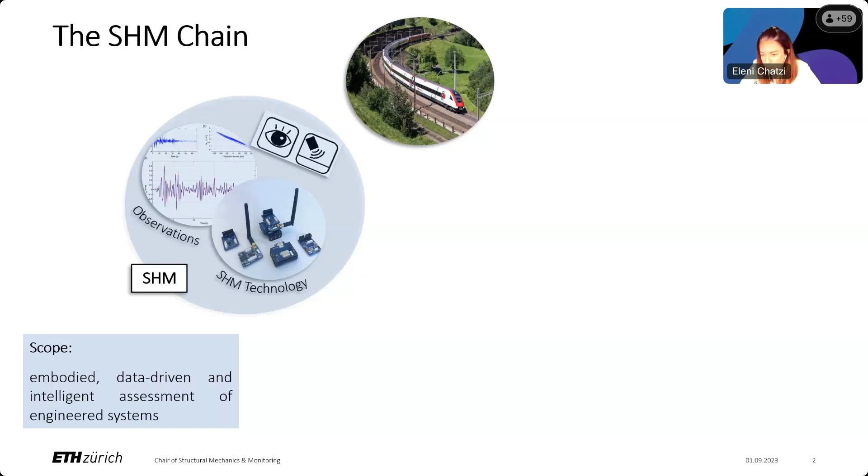And structural health monitoring, from my point of view, can only be conceptualized as a chain which initiates with the gathering and accumulation of data from different types of sensing sources, offering heterogeneous information of diverse types. In my group, we're particularly interested in exploiting vibration-based signals because often they are very rich in content and information. And that's also why in the chair of structural mechanics and monitoring, one of the domains of our expertise is also structural dynamics.

And what we try to do on the basis of this accumulated data is to exploit the information and translate it into something that is interpretable, something that can be used by engineers for the management of their assets, typically in two configurations: the diagnostic configuration, where we try to assess the condition of the system as is, and the prognostic configuration, where we're interested to predict the future performance or remaining useful life of a system, extracting quantifiable indicators that can guide their operation, maintenance, and overall management.

Now, of course, the translation of data into meaningful information is not trivial, and this is where the particular expertise of my group comes in, which lies in the exploitation of models that draw from principles of physics, in the sense of mechanics or dynamics, and where through these models we can actually maximize the information that can be drawn from the raw data.

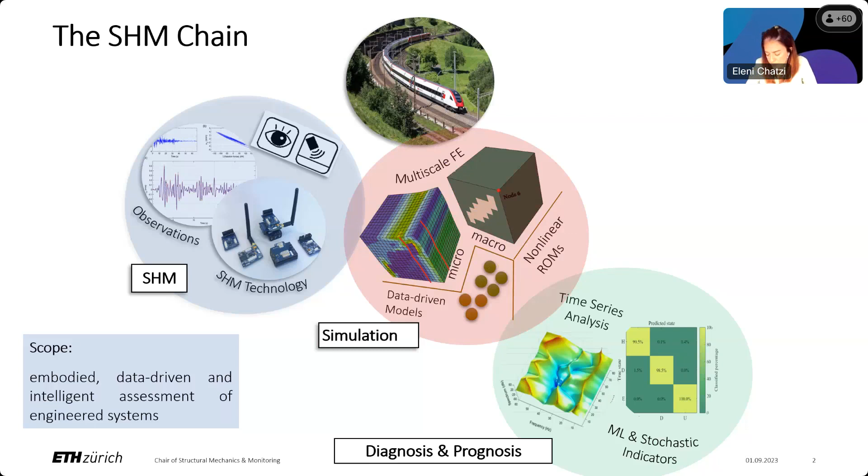And after creating this kind of a synergy and these quantifiable metrics of system performance, we try to then extend these to the system level. So I spoke earlier of wind turbines, but we're also interested in trying to understand performance at the level of the farm, or the fleet of farms that are operating or on which we draw data from.

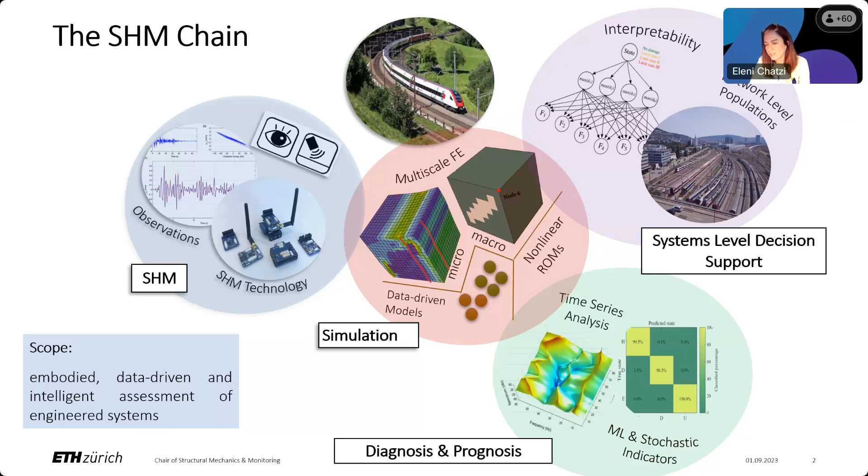Or if we're talking about more conventional civil engineering infrastructure, we would be talking not only about individual bridges or road components, but rather of the transport network as a whole, as an entity that can be managed on the basis of flow of data. So these are the elements of the chain that make up SHM, but also the chain that is relevant for us in terms of the fields that we're active in.

So as I mentioned before, we gather data from various systems. We have a collaboration with the railway authorities here in Zurich, where we use sensors mounted on trains or vehicles to understand the performance not only on the vehicle fleet side, but also the traversed infrastructure side.

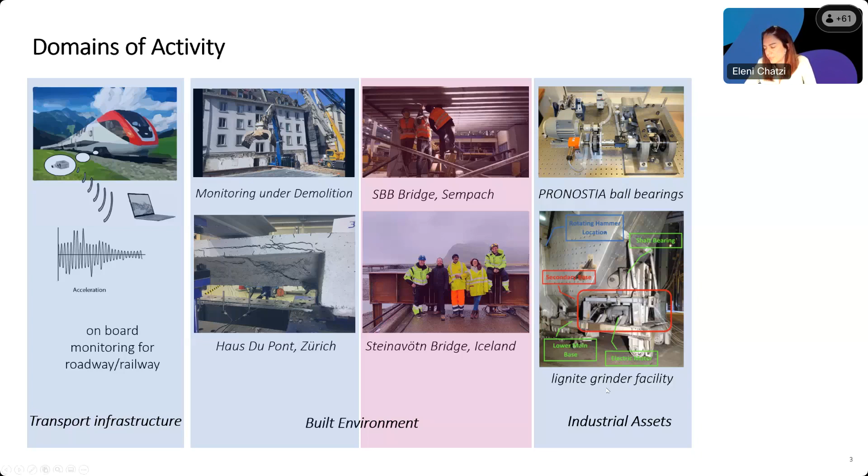We deal with more traditional civil engineering applications like the monitoring of buildings under, for example, seismic excitations, or the monitoring of bridges under the different types of loads that they are exposed to, including aging and slow evolving deterioration forcings. And of course, talking about condition monitoring, we also have applications in the more traditional area of industrial assets, and of course, wind energy structures.

In fact, it might be interesting to know that we even own a turbine. So this is a turbine that is not too far from our campus, which we use as a living lab. It's sort of a toy in a sense that we try to use and experiment with for testing and verifying our methodologies.

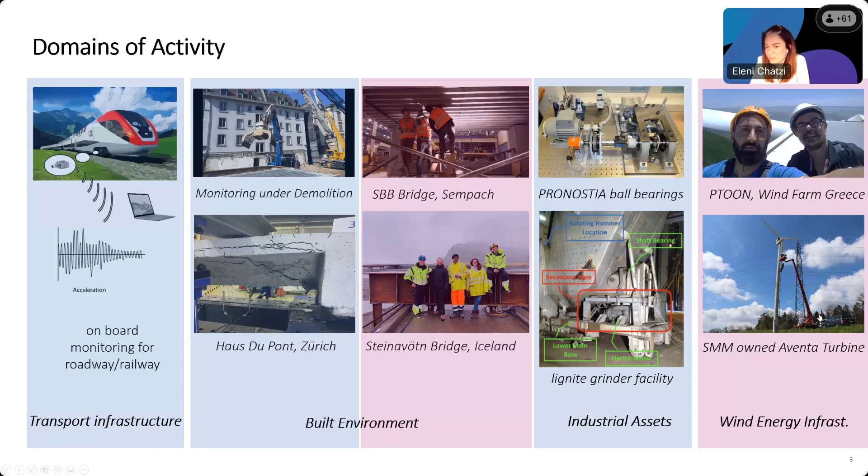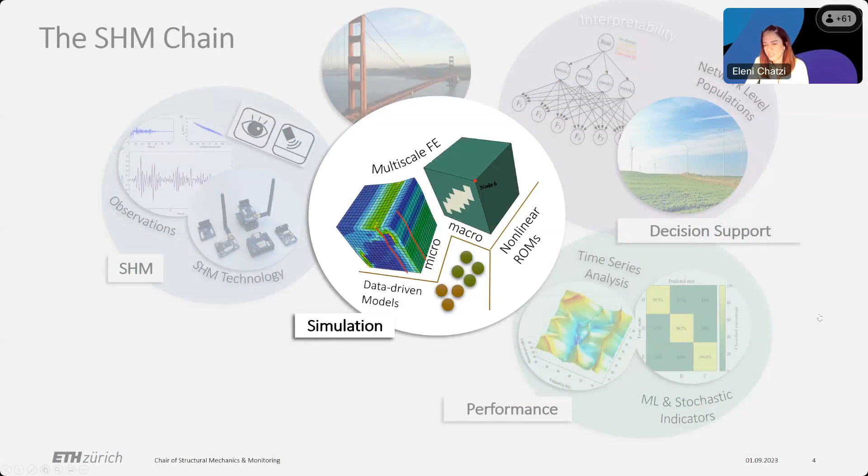And so I will focus in this talk, as the title somehow hints, on the aspect of modeling or the inference of models and how this can be used in a way that maximizes our understanding of a system, which is what we would like to do at the end of the day. But before I do that, I always think it interesting to also point out what we can do on the basis of pure exploitation of data without necessarily trying to include some knowledge of the physics that underpins our problem.

And to do this, I will show you again an interesting application here at the farm level from wind energy monitoring. So in this case, we're trying to see if we can produce a data-driven model that can capture the effect of wakes, which is actually the effect that these front turbines will have.

Now, if you would like to model this with physics, the problem could become quite complicated, and there are models that try to approximate the problem, but of course there's no guarantee that they reflect exactly the condition on site. So to tackle this issue, we actually use the data that we draw from monitoring of these turbines, so data at the level of the hub that give us information about the mean wind speed and orientation, as well as the power production, but also moment data that has to do with the loads that are experienced by these turbines.

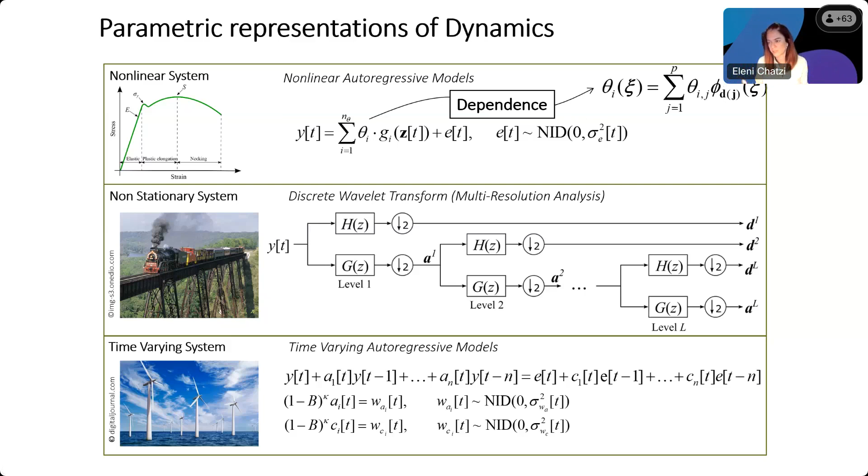And this is quite convenient because when you want to have a holistic representation and a dependence on influencing agents, a parametric model gives a natural means to do so, because these coefficients or parameters of the model can be conditioned on these influencing agents. And this is one way to do this. Actually, the expression that you see here is through a polynomial chaos expansion. It's basically an input-output surrogate, stochastic surrogate, which gives the dependence of these coefficients as the environment changes.

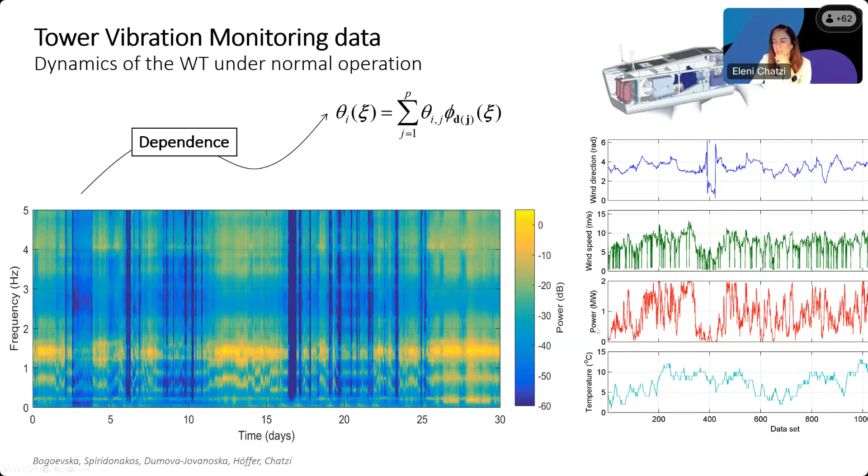And if we can do that, then we can train for a sufficient period of time our hierarchical model and then use it as a predictor and understand the deviation between what we predict and what we measure. Of course, there will be outliers which require robust outlier analysis and statistical analysis so that we can then classify the alarms that we receive, or rather the indicators that we calculate, as in the green region. So operating as expected in normal conditions.

In the red region, so in known environmental conditions, we receive alarms. So this means we have to act, or we have to signal for repair or intervention on our system. Or we receive alarms which are actually outside of the regular thresholds of our environmental conditions. And this is what we would issue as an orange alarm, which means that there's something off, but it could be off because we are in a new environment. And this is something we have to treat with further analysis.

So in structural health monitoring, because we're often in close collaboration with operators and engineers, we like to present these red, amber, green type of alarms to the stakeholders. And this is something that they're more comfortable with, that they understand, more so than just a plot with outliers.

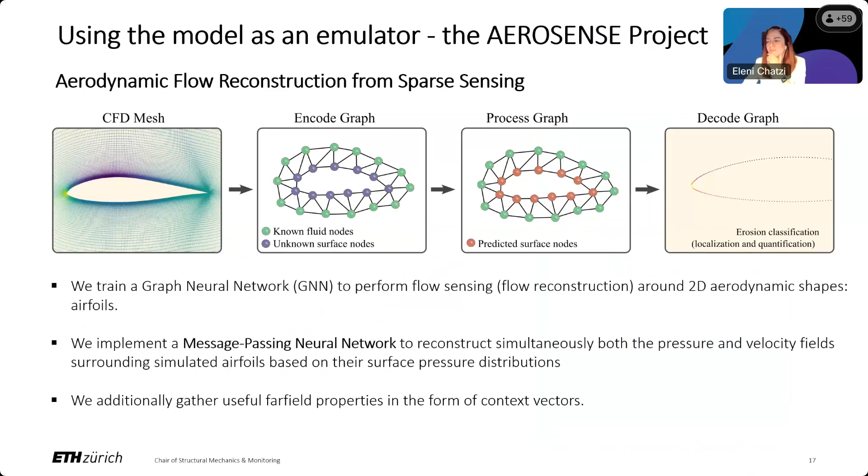And on which I would like to actually focus on. So let me actually go directly here. How we can fuse data and physics-based models for learning, monitoring, and twinning, and feasibly do so in real time.

Now, the reason why this is not an easy task is not only because of the complexity of the models, which is often what causes them to be slow in terms of computation, but it's also because the effects that we have to account for are rather complex. I already referred to the aspect of loads that reflect varying environmental and operational conditions. This could also refer to loads that lead our systems to experience nonlinear behavior that is beyond the easy to compute, let's say, linear elastic range.

In fact, most of our loadings are distributed loadings, so it's not easy to model these with just simplified point sources. And further to this, they're also in most of the cases actually unknown or even unmeasured. And so we have to deal with all of these intricacies and try to deliver a predictive model that can cope with this uncertainty and do so in real time.

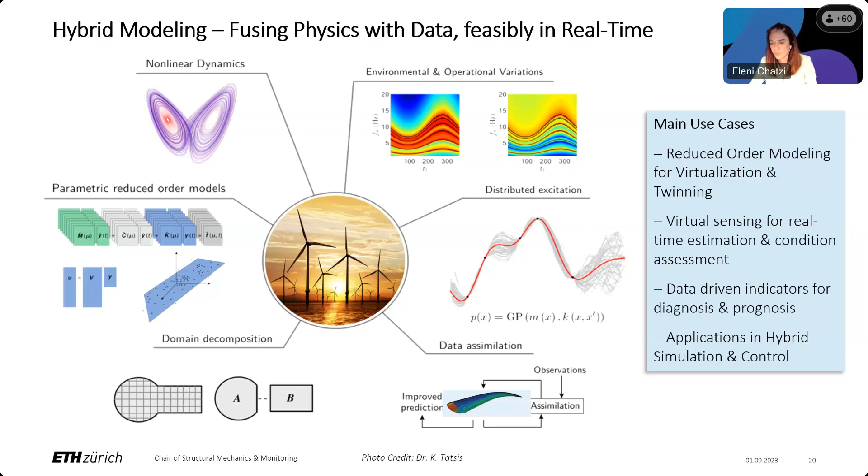And the motivation being that we would like to use this as explained before for twinning applications, for the goal of virtual sensing. Virtual sensing is the situation where we wish to extract information from a system, predictive information beyond the usually few and sparse locations where we sense. And when we try to construct a proper digital twin, this is very, very important because we should not just be predicting where we measure, but rather in the full field of this object that we try to monitor. And of course, the downstream tasks are numerous, including control and diagnostic aspects that have to do with maintenance.

So I will pick one of these tasks to exemplify the framework that we have set up. And for me, the most interesting, as I sort of hinted, is the aspect of virtual sensing. Predict the response of the system feasibly in real time in locations that are not measured, or as I come to refer to it, basically achieving everything everywhere all at once. And here's what I mean by this.

This is our typical monitoring problem where we have a structural system on which some sensors, usually few and sparse, are located. This gives us some sort of measurement information. Our system is operating under inputs that we cannot measure. That's the case for a bridge. Even for a wind turbine, we claim to know the wind speed and direction, but we don't really know the proper distributed force of the wind or the wave as it is acting on our offshore structure.

We have, as engineers, some sort of a priori model that was used to put the system in place, but usually it's not an accurate model, or at least it's not a model that has been updated necessarily to reflect the system at its current point in time. And therefore, it could feature unknown parameters additional to model form uncertainty. And the objective is to extract the response of the system. These so-called unknown states is the response of the system in unmeasured locations, which actually can be numerous.

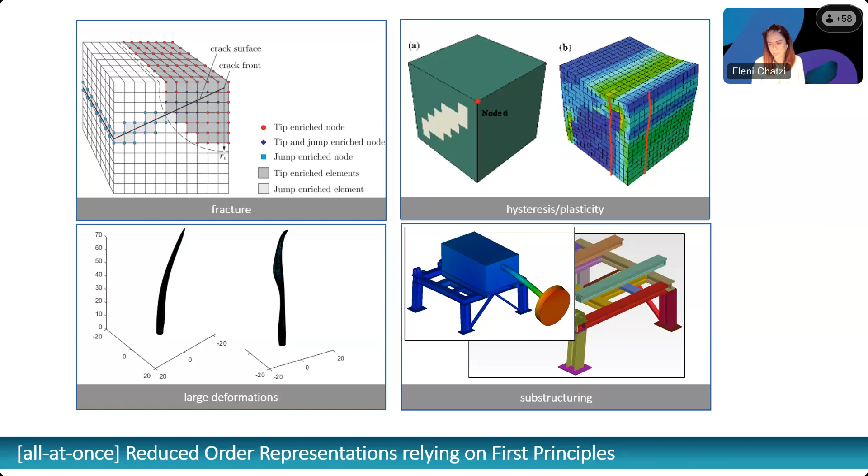We need to boost this kind of a computation, and one way to do this, which is quite popular in recent years, is to do it through exploitation of the power of learning through machine or deep learning formulations, all the while, though, respecting the fact that we have to learn from physics and engineering intuition. So here's one approach to doing this.

This is work by Tom Simpson, one of the PhD candidates who recently graduated from our group, who tried to reduce full order complex finite element models. For civil engineering, this is one of the favorite types of models, usually with a large number of degrees of freedom, which compute in terms of dynamics most often quite slow.

And so what we did was to train on several instances of such models, or at least on several forcings that are applied onto such models, to extract a so-called latent representation of this multi-degree of freedom system, essentially a reduced order space where the dynamics of the problem lives and can be characterized, but with a condensed representation. And then we try to apply the actual forcing of the system onto this reduced representation.

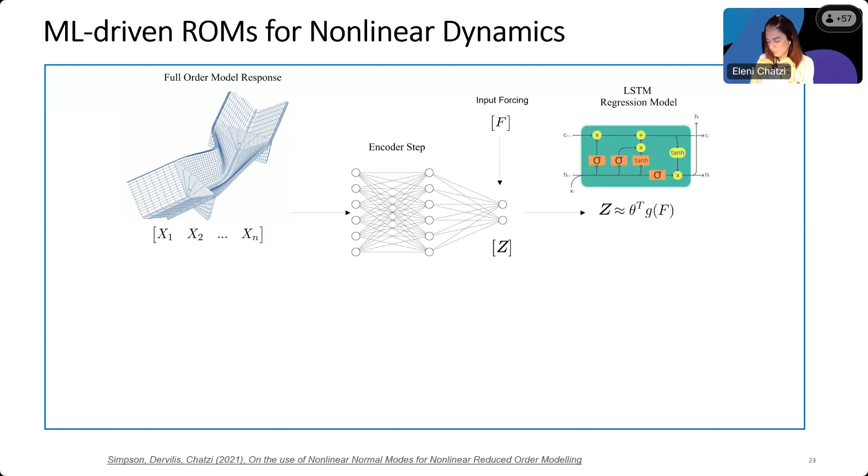And we used a numerical integrator, or the equivalent of this for neural networks, which is in our case an LSTM, RNN type of model that takes our prediction from point in time tk to the next point in time. So now we have computation on reduced coordinates, and we have a possibility to simulate the system in this reduced space over time.

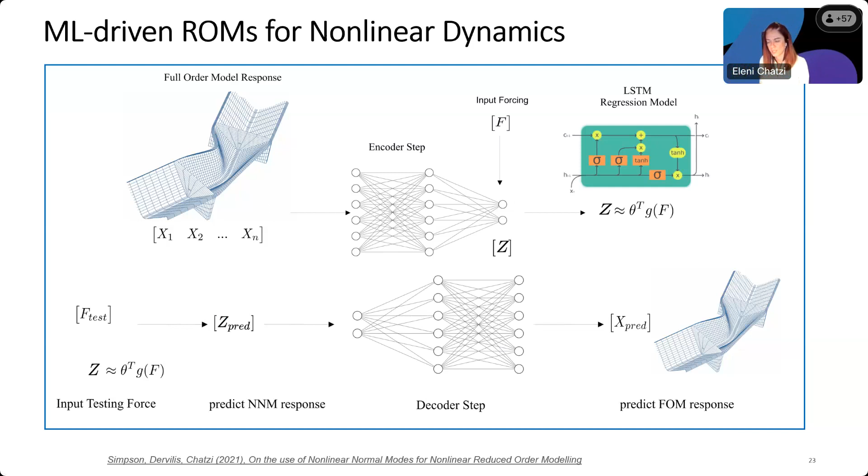At the same time, through the nice property of autoencoders, we can go back to our original representation, the original finite element model, through the decoding step, and extract the response of our desired system in the full field, in terms of strains or accelerations, in general in terms of the quantities that we're actually going to measure eventually from this system, simply through this decoding procedure. So this gives us significant acceleration. It allowed us to simulate systems that are nonlinear.

So this one is actually a nonlinear benchmark that was defined by our colleagues in Los Alamos in the US, a nonlinear frame with a bumper where the response of the system is challenging to simulate with traditional system identification tools that prefer linear systems. So here we simulated the system using this autoencoder logic, showing that the reduced space that we extract from the system is actually a type of nonlinear normal mode.

So they're basically modes that are independent. The majority of the spectral content of these modes actually reflects a specific frequency. They're still nonlinear representations, but it's actually what empowers us to then simulate the system using this reduced representation, even in the nonlinear case.

From a practical viewpoint, we implemented this logic on the nonlinear response of monopile wind turbines, where nonlinearity comes from the behavior of the soil, where you see these typical PY curves on the basis of which the wind engineers will simulate these models. And that's indeed what our colleagues in Siemens Gamesa did.

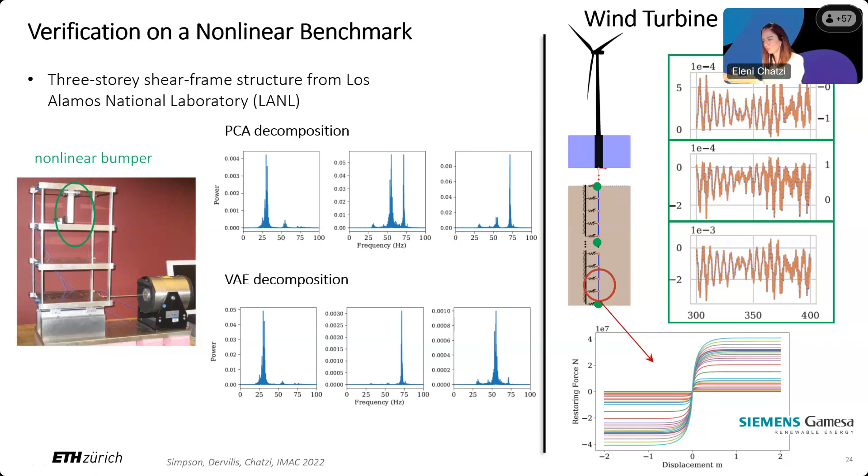They did the actual simulations on which we trained this autoencoder type of reduced order model, which then replaced their simulation with high accuracy, only it did so in fractions of a second, meaning it gave us a computational model which can compute in real time and can be later combined with data, which is really what we seek to do.

A bit of an issue in this reduction approach is that for most of these configurations, we haven't so far discussed the issue of simulating systems of different parameters. So even this monopile structure is actually a fixed structure and system, which we simulate under different types of loads, and we try to accelerate the simulation for this particular instance.

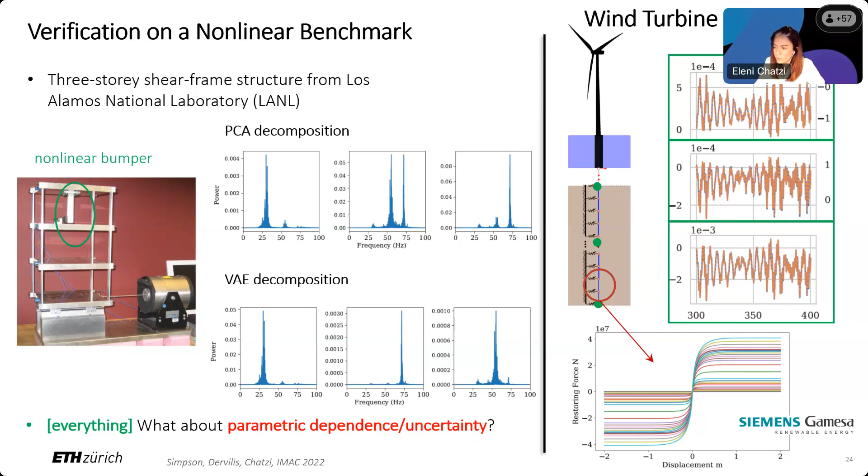But if you want to have a general model that can compute over different parameters and different configurations, so different shapes of the tower or lengths of the blades and whatnot, we have to construct a so-called parametric surrogate. And to do this, one of the approaches that we follow is the so-called projection-based parametric reduction.

It's actually a Bouc-Wen type of model, which means that the response of the system to earthquake loading, which is a typical excitation for the analysis of these structures, is nonlinear. And what we would like to do here is to produce a parametric model, so a reduced order model that can run for different configurations of the system, meaning for different properties of the hysteretic model of these nonlinear joints, but also for different characteristics of the input forcing, the earthquake, which can come at different amplitudes and with different

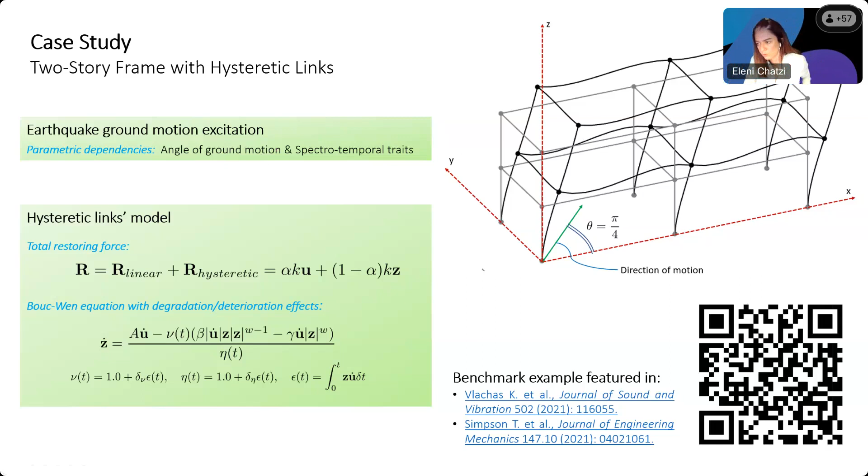spectral contents. So to try and do this, the first thing we have to do is to actually parameterize our input, because we need also the input to be something that can form a part of our defining parameters of our model. And it turns out that for earthquake sequences, it is possible to actually parameterize these, and this was shown in the work of Rezaeian and Der Kiureghian.

And we followed that work and essentially took real instances of earthquakes from the PEER Strong Motion database, where more than 2,000 actual earthquake time sequences have been recorded, and we broke them down into parameters that essentially have to do with the spectral and temporal characteristics of the earthquake, how the amplitude evolves over time, and what is the spectral content of the earthquake sequence. And by breaking them down into these parameters, we can actually now take a specific earthquake time series represented with these parameters that now form part of the definition of our problem.

But perhaps the more difficult aspect here is to see how to reduce the nonlinear system itself. So, okay, we parameterize the input, the load, but we also wish to execute our simulation for different characteristics of our frame, maybe different elastic characteristics, but also hysteretic properties. And so to do this in affordable computational time, we follow a projection-based approach, where the original nonlinear dynamic equation of the problem, which is an ordinary differential equation, is brought down into a much smaller dimension, a dimension R that is affordable to compute.

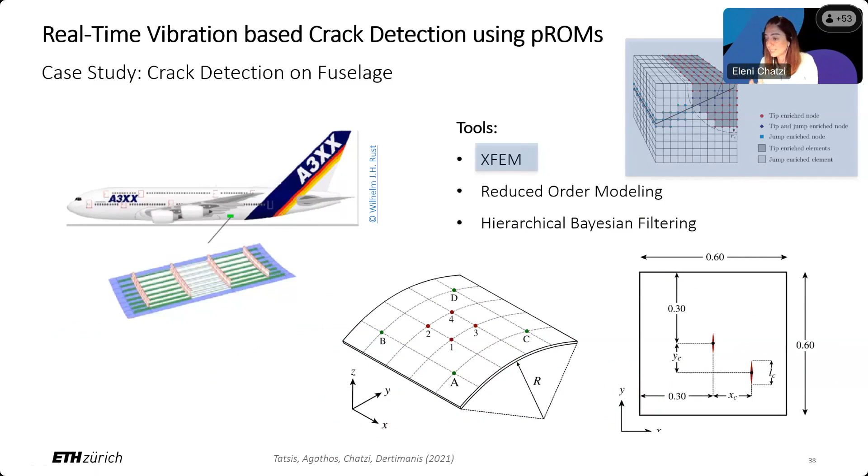And here's the problem. When a parameter of the system is a crack, which can have different locations, if I am to use different meshes, or even the XFEM approach, which is particularly adept in keeping the same mesh but still adding degrees of freedom, suddenly, if the location of the crack changes, I would not be able to have the same type of reference for my system. I would not be able to produce modes that match or make sense. Because of these crack parameters, I would have a non-smooth problem, which, however, we tried to tackle by bringing back our knowledge from physics and mechanics.

So we used a sort of trick. We used mesh morphing, where we take the original curved configuration. First, we map it into a flat mesh, and we assume that we have a reference crack somewhere located conveniently within the main body of the object, which we then distort. We basically distort the mesh using modified inverse distance weighting, which allows us to bring the original crack into a new location.

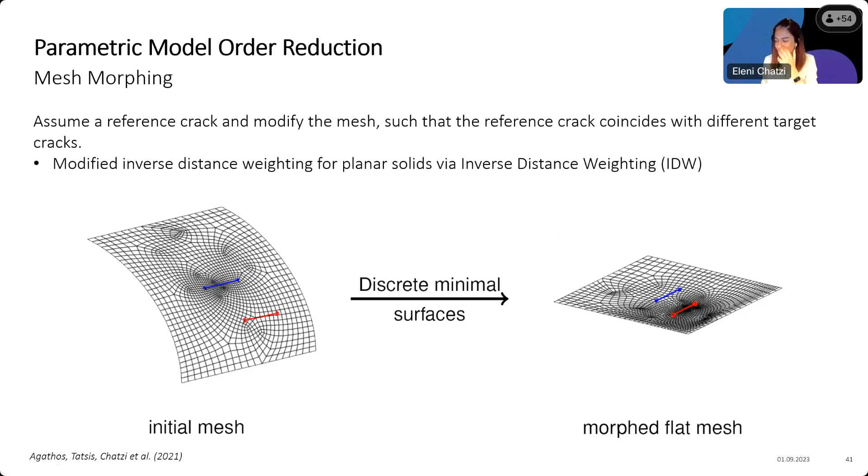So we can then represent a new crack within our space, but using the exact same nodes and the numbering remaining the same, which means that I can then also use this logic of reduction by referring to the same node numbers. And now I am able to use the reduced order model that I explained before to approximate the dynamic response of a cracked curved surface. And I can do it in real time, which is actually faster than this video, luckily for us. And this means that I can also feed the measurements that I have in the Bayesian logic that I showed before, together with this reduced model. And indeed, this is what we do.

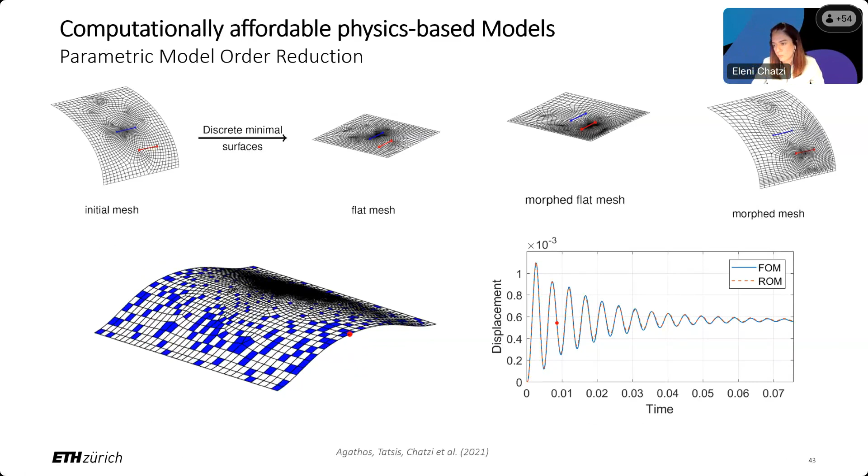There is actually even a further step of complexity here, because the input in this kind of system is certainly not measured. So I have to operate with a filter that can tackle unknown inputs. There are many such filters. Here we use an augmented Kalman filter to do this. And in fact, we use a bank of parallel instances of these filters so that we can at the same time infer not only the response of the system, but also the parameters of the system, which include the location of the crack, which is the defect we're trying to identify.

And in fact, we can do it at a fraction of the time that is required, even by improved solvers and accelerated models. So 22 seconds would be the best case scenario for a FEM-based approach. 0.12 seconds is what the surrogate here can achieve.

There is a further complexity here that I'm not going to go into details of, so I'd rather just keep this for later in case there is interest for this. It's how we would tackle further challenges relating to input. So let me see if I can skip this because it seems a bit stuck.

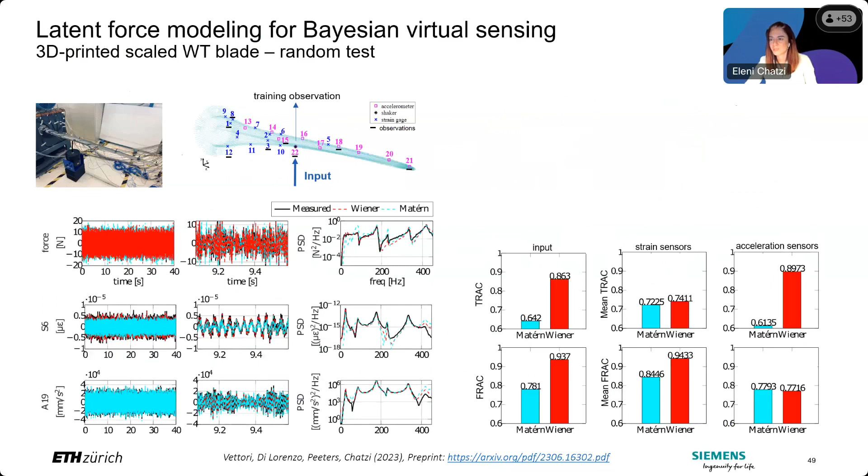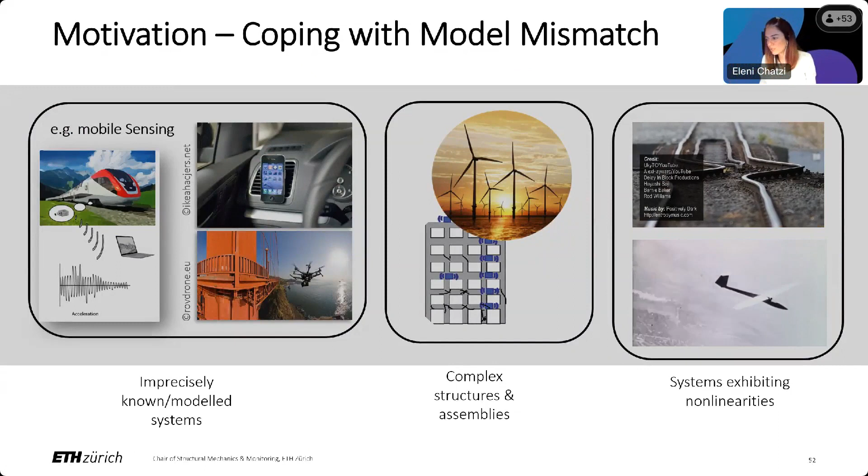There we go. So what I would like to discuss here, finally, is the aspect of model discrepancy. Because what I showed before actually is very nice, and I showed that it works well on simulated data, but what happens in real cases is that additional to uncertain inputs and uncertain parameters of our models, we also have model mismatch, what we call model form uncertainty. In other words, we can never promise that our physics is good enough to capture the full phenomenon of what we observe.

And to tackle this, we have been working with our group in Singapore as well, but primarily with this group on the development of physics enhanced, as we call it, or physics infused learning. And we have been playing with schemes that are so-called physics guided schemes, where the physics comes through explicit incorporation of equations into the problem. Physics encoded schemes, where we try to force the neural network architecture to respect the physics of the problem.

For example, we use neural ODEs to reflect systems that form ordinary differential equations, or physics-informed schemes where the infusion of the physics is a bit more loose, but it tries to bring in concepts like Hamiltonian principles, symplectic integration that would go well with those principles, or physics-informed neural networks, where again, in the likelihood function, we try to demand the satisfaction of specific governing equations. So we try to actually organize the different tools that exist in the spectrum, which reflects the use of physics versus the use of data.

So the Bayesian filtering scheme that I mentioned earlier tends to use a lot of physics, but requires less data because it assumes a good knowledge of the physics that's underlying the problem. But as we go into more physics agnostic representations, we tend to rely more heavily on the data. Or we can try to merge the two into something that is a compromise.

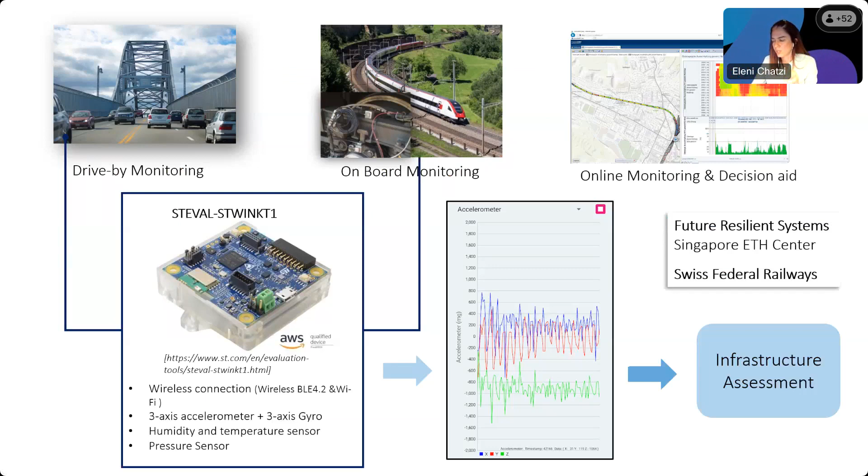And that's what I would like to show here as a final application, an application which we use for drive-by monitoring. This is basically the assessment of traversed infrastructure, roads or railways by trains or cars, where the sensors are mounted on the vehicles, the collected information is vibration, and we try to assess the condition of the infrastructure itself.

We do this by using these models that are in the in-between or gray zone of that spectrum, where we have some knowledge of the physics, but it's not perfect. And we add a learning model that is there to take on the portion of the physics that we simply do not know or is at least hidden to us. By superimposing these terms and learning a combination of the two, we're able to make up for this model form mismatch, but we're also able to bias what would have been a purely black box model by the partial physics that we know and which operates beneficially for our system.

Here's a simple example. Let me not go into the details of this, but let me rather show you this application. The simple example for the case of drive-by monitoring, where we're trying to understand the roughness of the road surface, and where we fuse a model of the vehicle, at least a partial model of the vehicle that tries to approximate it, plus a portion that is a learning term, a deep learning term that tries to make up for the unknown or the model form discrepancy. And there is actually a logic, a weighting factor that is the optimal combination of the two.

This is actually not something that the user tunes. This is just forced here to show the point. It's something that is learned by the framework and that allows us to get the best of both worlds. We have actually also experimentally validated this logic. Because I'm close to the end, I will not show you the experimental validation.